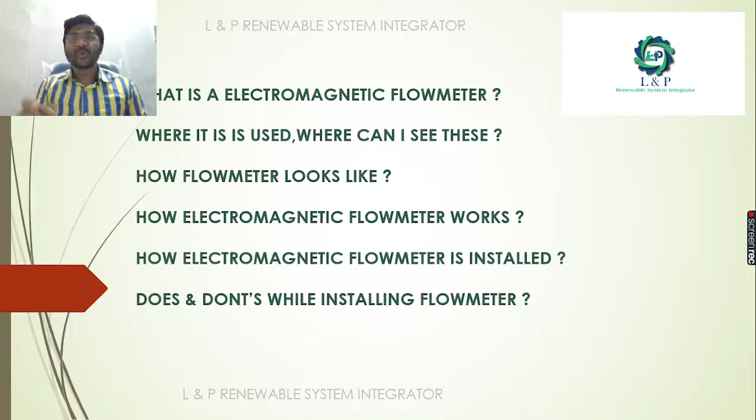So today what are the things that we are going to discuss? What is the electromagnetic flow meter? Where is it used? Where can you see this? How it looks, how the electromagnetic flow meter works, and how we can install it. What are the do's and don'ts while installing this flow meter?

So if we consider the electromagnetic flow meter, it consists of two important parts. One is the transmitter and the other one is the sensor. Together they measure the flow of the liquid flowing through the concerned tubes. A magnetic flow meter has its sensor placed in line, and it measures the induced voltage generated by the fluid as it flows through the pipe.

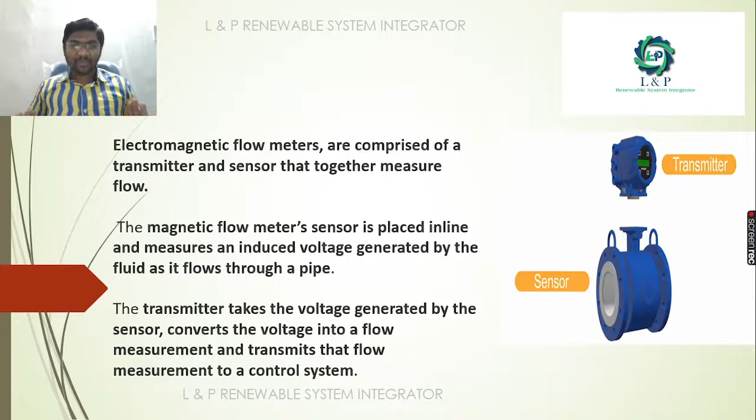The transmitter takes the voltage generated by the sensor, converts the voltage into a flow measurement, and transmits the flow measurement to the control system. So this is how a basic electromagnetic flow meter works.

So where can I see this and where can I use this? We can see this in domestic water systems, industrial water systems, raw water, groundwater, urban sewage, industrial wastewater systems, and even in processed neutral pulp, pulp slurry. In so many places we can use this.

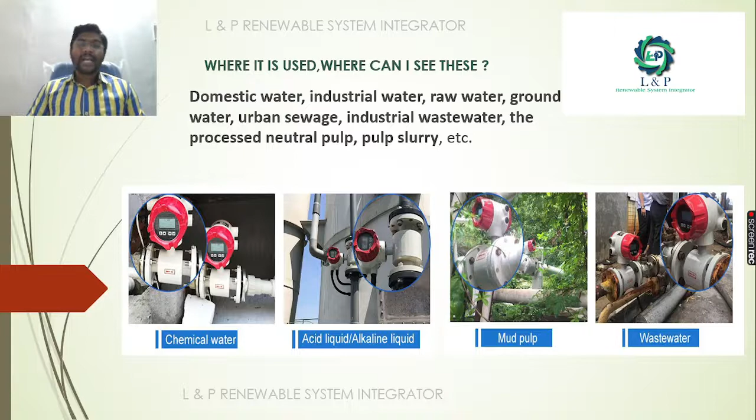Electromagnetic flow meters can be used to measure the flow of chemical waters. We can use them for acid liquids and alkaline liquids. Even for wastewater and mud pulp, we can use these electromagnetic flow meters. Most importantly, we have so many varieties of electromagnetic flow meters, and the choice is decided based on our application and the flowing liquid.

Basically it works on Faraday's law of electromagnetic induction. According to this law, say this is one magnet and this is the other magnet. If you place a conductor in between them, an EMF will get induced. We can take that EMF from the two terminals of this conductor. This is basically how an electromagnetic flow meter works.

See here, there's an animation video. We have a magnet. When there is a flow, immediately an EMF is generated. As we told earlier, the transmitter converts that generated voltage into the required flow. So this is basically how an electromagnetic flow meter works.

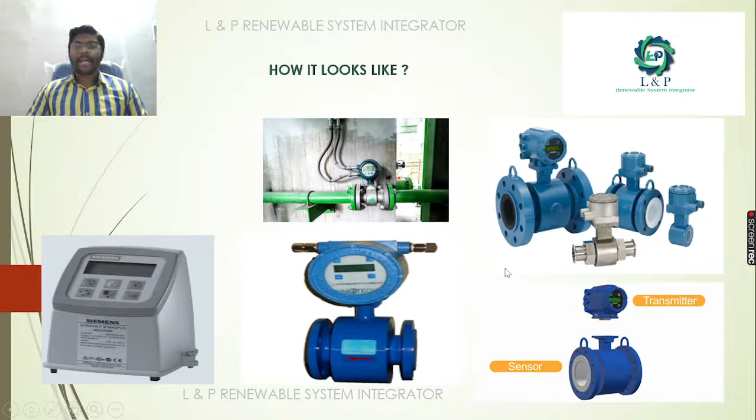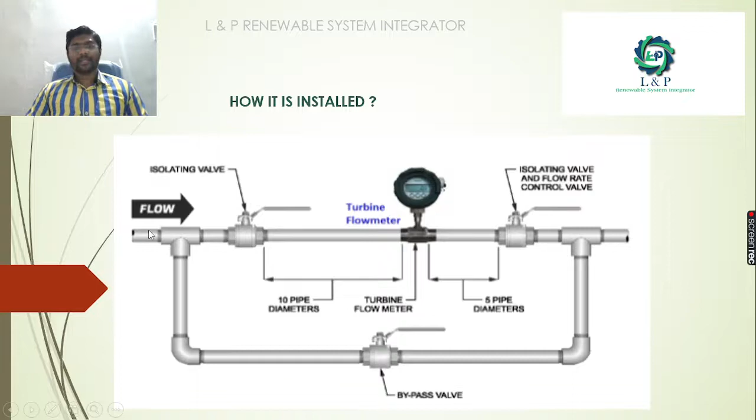As for how it looks, there are so many varieties. Even a Siemens flow meter looks like this. Based on the companies, there are many varieties of electromagnetic flow meters. But the basic thing we need to keep in mind while installing is: if there is a flow from here to here, we can install our flow meter here.

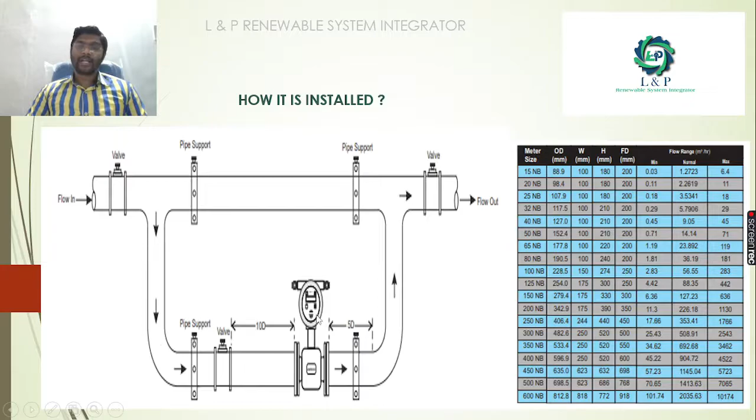Most importantly, there are many types of electromagnetic flow meters available based on the outer diameter of the pipe where we are going to install it and the type of liquid flowing. So if our flow is through this line, instead of installing here, we can install our electromagnetic flow meter here.

The most important do's and don'ts while installing it: if the flow is from downward to upward, we can install our electromagnetic flow meter in the vertical line. If the liquid is flowing in the pipe from upward to downward owing to gravity, we should not install the electromagnetic flow meter there. Then there is no use of measuring the flow.

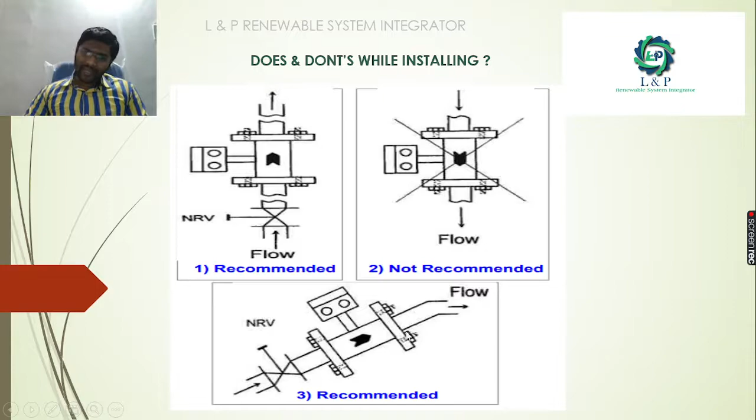If our flow is inclined, after the valve, we can install it in such places too. As we told earlier, at bends we will have much pressure, so we should not install the electromagnetic flow meter there, and even in free-flow downstreams we should not install it. In this position also we can install.

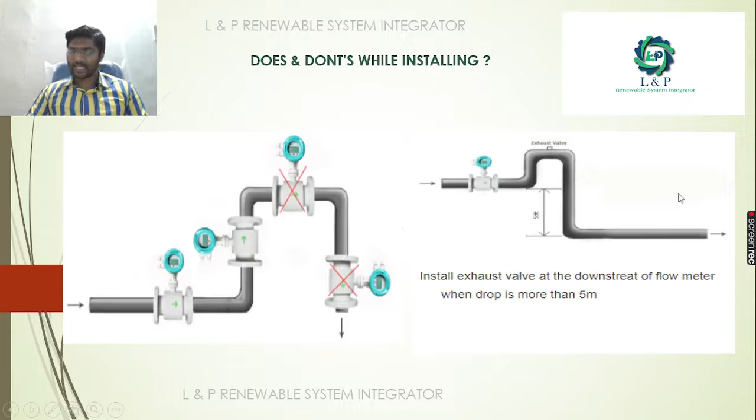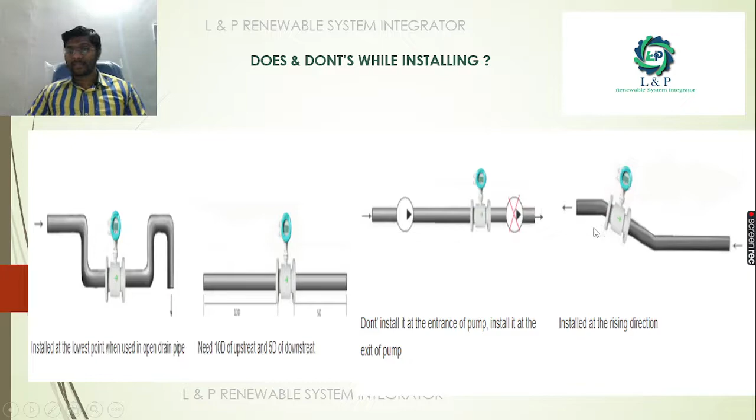So these are important do's and don'ts. We can also install electromagnetic flow meters in the rising direction. These are the basic do's and don'ts pictorially represented. Most importantly, whenever you are fixing it, fix it properly. The coupling should not be improper.

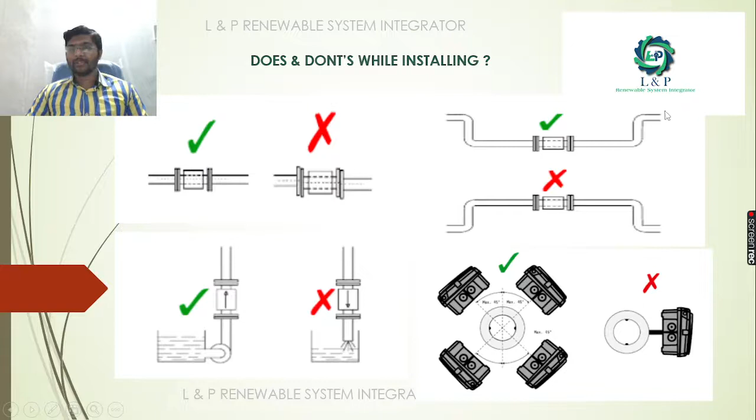If it is upstream we can install, but if it is flowing because of gravity, we should not install it in such places. Diagonally, in this position, we can install the flow meters. We should not place our magnets improperly. Even in the downstream position we can install, but in this position we should not install.